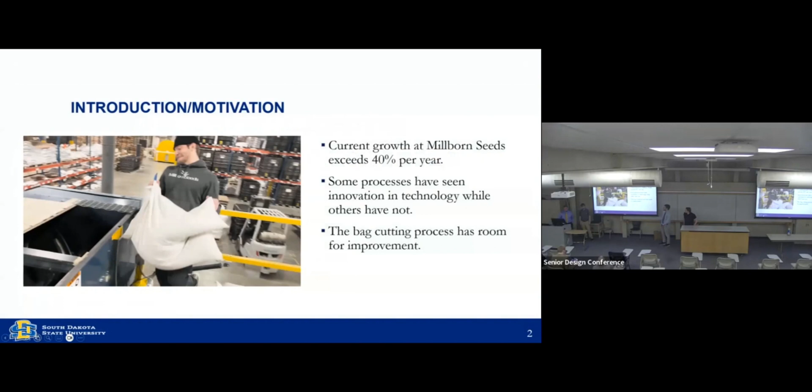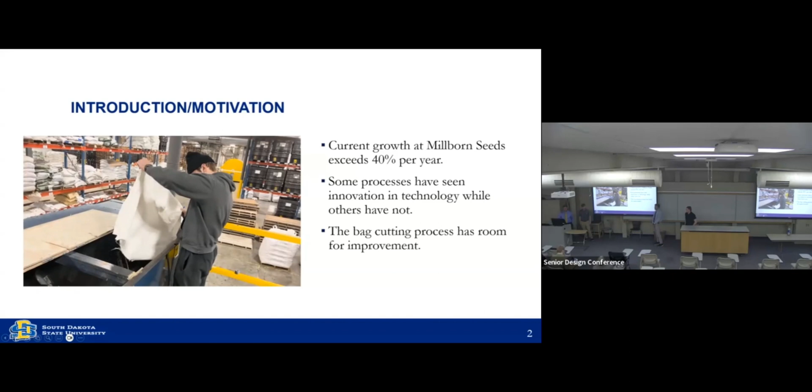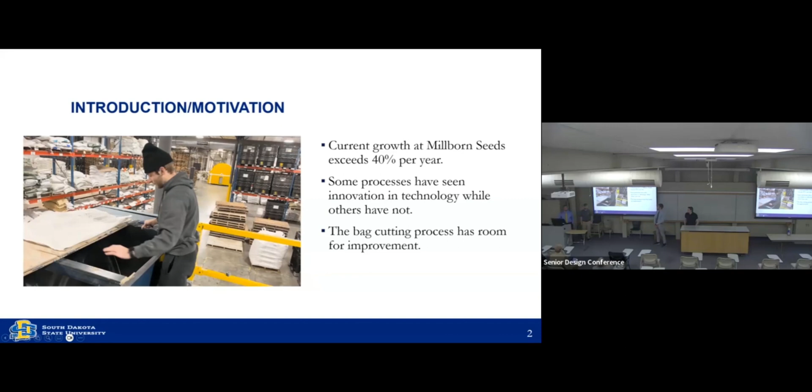So in the past few years, Millborn has experienced 40% growth every year. And with that, there's been a big increase in automation of weighing, packaging, stacking bags. One thing that hasn't changed though is the cutting, as seen here. And so with the device that we're designing, we're hoping to almost fully automate that. So our main goal is to increase the efficiency with which Millborn Seeds produces mixes by automating the cutting process.

All right, so looking at some of the requirements that our sponsor gave us, he mainly wants to prove the concept for different designs that we want to go forward with. Right now, one person does about 4 bags a minute, and our goal is to hit 10 plus bags per minute, and maybe even higher if there's more people operating. Basically 99.9% of seed needs to get out of the bag, so we can't have too much in the corner, because these can be like 50-pound bags, so even 0.1% is quite a bit, and it would cost them a lot of money over time.

So it needs to be able to be run by one operator. If 2 can run it and it goes faster, that's great, but 1 operator is a requirement in case they don't have a lot of workers that day. They don't want to cut it down. Our maximum size that he gave us was about a 20 by 20 area. He says we can go longer in one direction, we just can't go into the halls that they have set up. We need to make sure there's easy access for cleaning. That's very important, otherwise the downtime between different mixes of seed is going to be way too long. And it needs to be user friendly for the operator, so on and off as their only control, and it needs to be ergonomic for bag loaders.

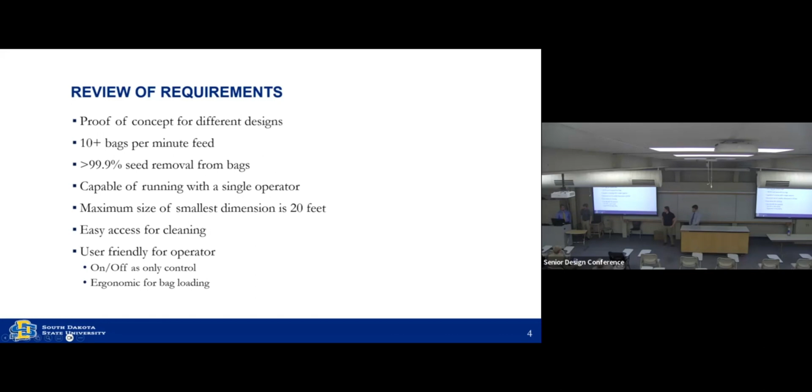On the top is a little filter that gets rid of the dust and kicks back the seed so they don't waste any of it. And then they kick out the bag to the bottom and drop it through an auger, which we're not going to go into in that depth.

All right, so the first aspect of design we took into consideration was the blade types, as we have to open the bag before we do anything else. So the designs we wanted to talk about were single saw, multi-saw, band saw, and a hot wire. The hot wire was eliminated right away because of the melting bags problem. But some of the other considerations with these blades were we have multiple different bag sizes and multiple different bag types. So we have a paper, a poly, and a plastic bag.

So we want to make sure that whatever blade type we choose is able to work for all of our bag types and sizes. So from that, we made our decision that multi-saw would likely be our best, as it would split it into smaller pieces so we can get those clumped up seeds out of the corners of bags.

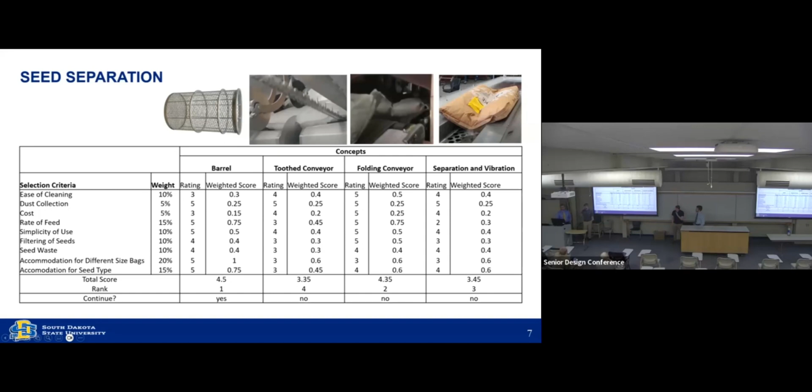But we went with the barrel for our design. The last thing, which was very vital for Millborn, is that in between pallets of different types of seeds, they want to clean out the seeds so there's no cross-contamination between different types. As of now, they're using leaf blowers and other air nozzles in some of their other mixers and machines.

This was an important thing for them, so three main things we wanted to do were air nozzles and fans for manual blowout, but we want to try to get away from this manual blowout. Air nozzles and fans were our main idea, putting fans in the system to blow all the dust and seed into the main section where the barrel was, and having compressor nozzles going out to any spots where seeds could get bumped up, so our dust system sucks all of that out the top.

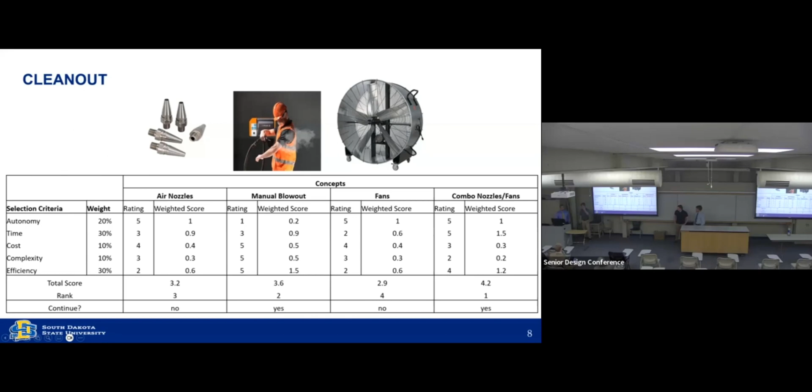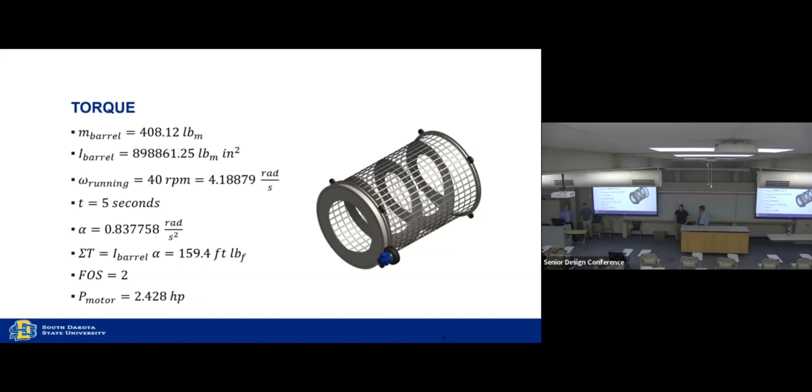So we are looking at a running angular velocity of 40 RPM. This will allow 2 bags to be within the barrel at the same time, within that 6-second window. We were looking for a startup time of approximately 5 seconds, as the maximum is going to be that starting torque, not the running torque. From that, we were able to get a starting torque of around 160 foot-pounds. Incorporating a factor of safety of 2, we need around a 2.5 horsepower motor to operate that barrel.

That has led us to our main model here, pictured on the screen. On the right hand side, there is a frame with a barrel inside. The seed will come up the conveyor, down slope through the blades into the barrel, where it will disperse into the frame. Looking more closely at the cutting apparatus, we are going for a 2-blade design with adjustable widths, so the blades can move in and out to accommodate different bag sizes.

Within the barrel, it'll likely be driven similar to how a cement truck mixer works. A tire will rotate, and the friction between the two will rotate the barrel itself. Included with that torque calculation is the normal force required pushing that tire into the barrel, which we figure to be around 60 pounds.

Within that barrel, there's a corkscrew that'll control the bag as it goes through. This bag will come in and move through the barrel, and there will be bars that flip it up in the air continuously as the corkscrew pushes it through the barrel, all mounted in the frame.

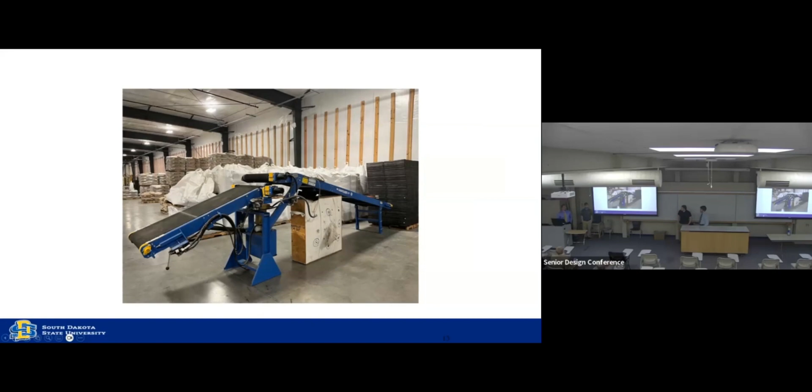Here's a picture of the already existing conveyors. This is something we're having to deal with. Changes to this will involve taking off the end section and increasing the height.

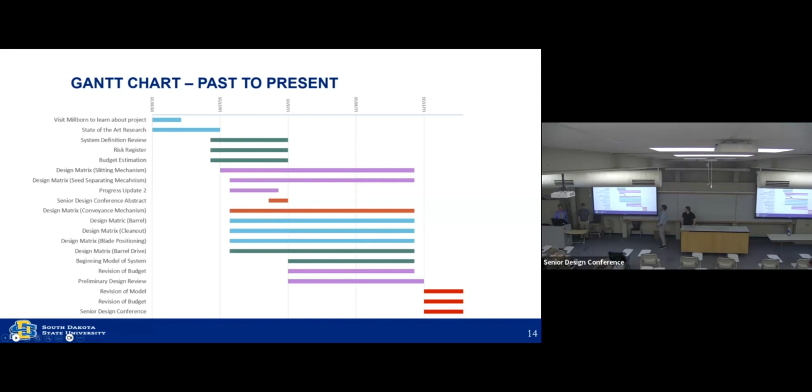Here's a look at our schedule. As Dr. Lesher mentioned, we didn't start this until October 20th. We just got our preliminary design review completed. Moving forward, the big thing we need to knock out before having a complete design in the second week of January is having a proof of concept ready for the barrel before we can decide on its length. We need to show how much time is required in the barrel before completely emptying the seed.

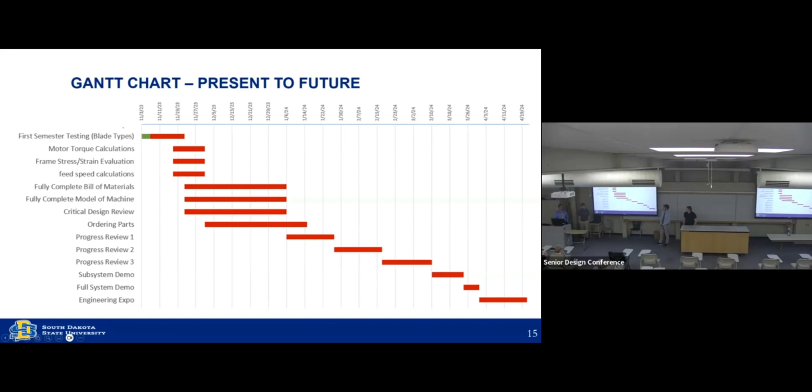Are there any questions?

Since you just started, will there be problems with the increased angle causing conveyor belt slipping of bags, or will there be enough grip? We are currently looking at maximizing that conveyor angle at 45 degrees. It is a rubberized conveyor, so there shouldn't be any issues with bags.

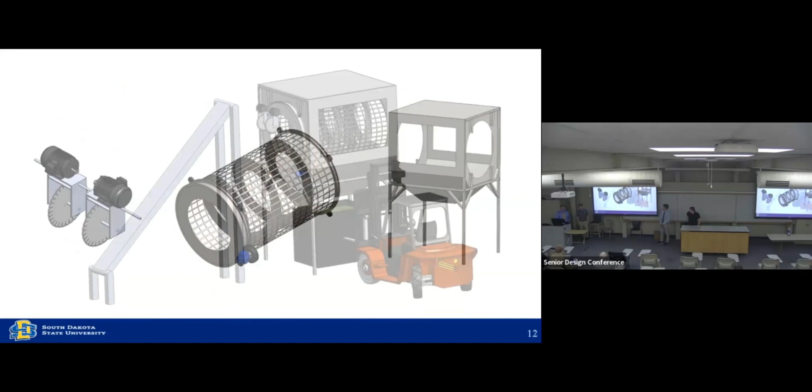Are you worried about seed not coming out of the bags if it's cut on one side and lands in the corner of the bag when it's spinning around? If you're talking about our testing photo, we weren't able to get a deep enough cut blade to get through the entire bag. Within the model, we plan to mount the blade above and have it recessed into the slide so we get full depth cuts. So you're planning on cutting the bag into 3 pieces, basically. Yes.

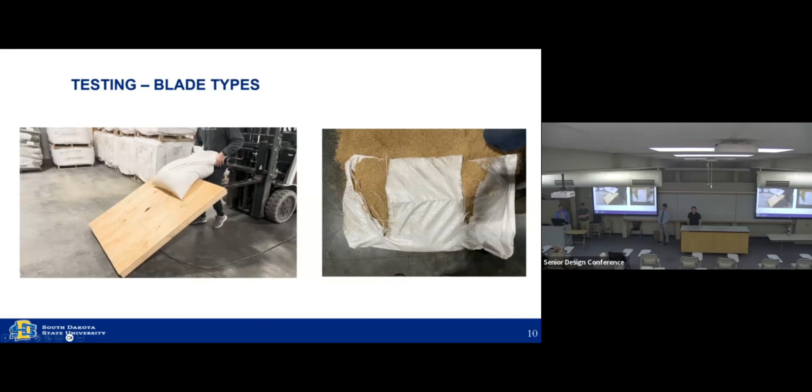Go to your next slide. Is there a reason it's so tall, or do you need it to be that tall? What's the reasoning behind that? This black box on the bottom is what they currently have to put all their seed into - the pro box. It stands about 5.5 feet tall, so we have to be able to get seeds in there with enough clearance for forklifts.

From this model, this cone shape will be reduced. We weren't sure what angle the seed would need to slide into that pro box - it's modeled at 45 degrees, but from testing today we saw that around 25 degrees works. That'll shorten it by about 1.5 feet, and decreasing the barrel diameter will decrease it by about 1 foot, so it should lower the center of the barrel to about 13 feet off the ground.

You thought about cutting it on the ground and then taking the seed up to the box, so you wouldn't have to have the barrel? Yeah, the problem with that is they're kind of a flimsy bag, so once you cut it open, there's nothing holding that seed on the conveyor belt, so it would just be spilling all over the place.

And if you're referring to cutting the bag at ground level, dumping the seed into something and augering it up - a concern with an auger is crushing of the seed. So they do currently use that as their mixer, but augering it multiple times would likely cause more damage.

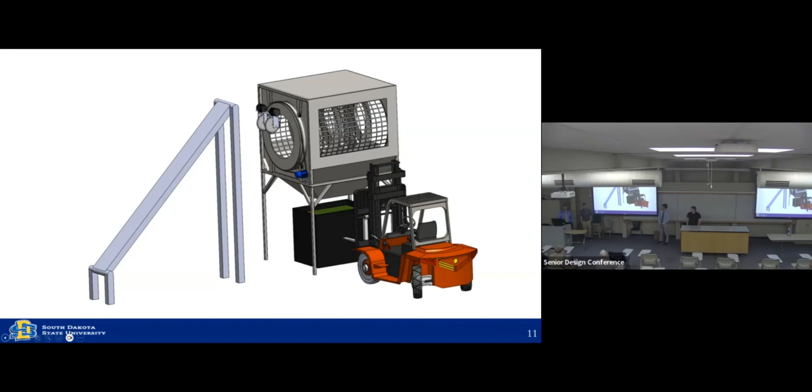It'll likely be through a control system. For the cutting apparatus, we plan on putting a power screw connected to the center, so they'll be able to move in and out in sync. Generally when they do this type of cutting, they'll cut an entire pallet of the same thing, so you can just set it for that bag, and then when you run your clean out, you can readjust your blades for the next pallet.

Are they relatively the same height? Will you have to adjust up and down for depth of cuts on different sizes, height-wise, or are they all kind of the same? Our blade, as of right now, should be big enough that it's kind of one size fits all, being oversized with the small bags, but big enough.

What size is the blade right now? 18 inches. That's a scary blade.

I know you guys were working on ways to drive that barrel, coming up with a wheel against the barrel, just maybe a minor modification. What if you replace one of the 4 roller supports with that wheel and motor? Because then it's automatically going to pull down into that, and probably have a little less tendency to try to push that wheel into the barrel. Just a suggestion.

If you're cutting the bags before they're in the barrel, and cutting them into full sections, are you worried about losing seed before the seed gets into the barrel? Yeah, so not pictured here - surrounding that cutting apparatus, there'll be a slope section with 2 slits in it lengthwise, and another slope section underneath. So any seed that falls through that slope section will be caught and pushed into the barrel itself.

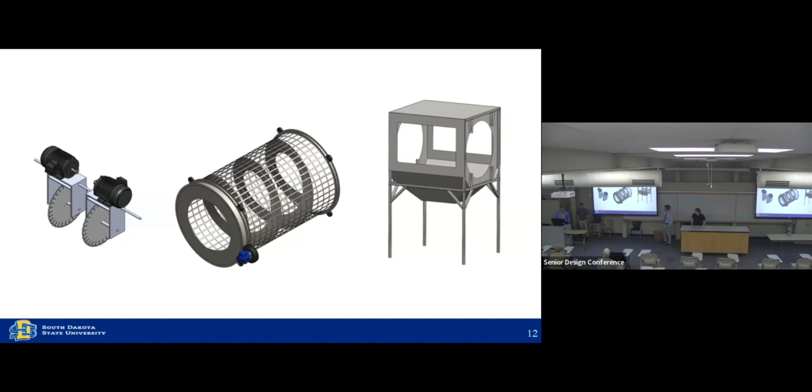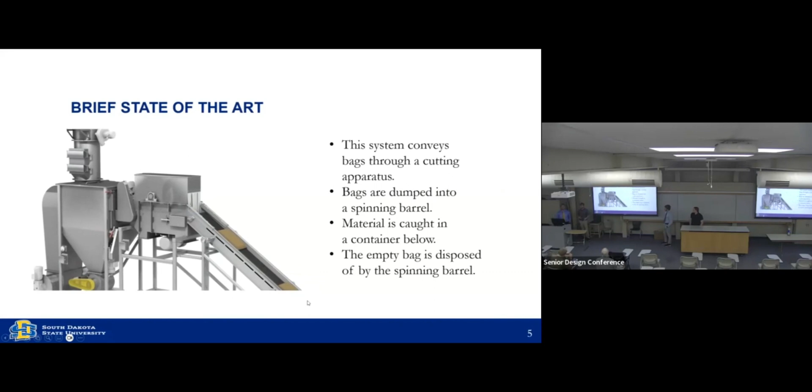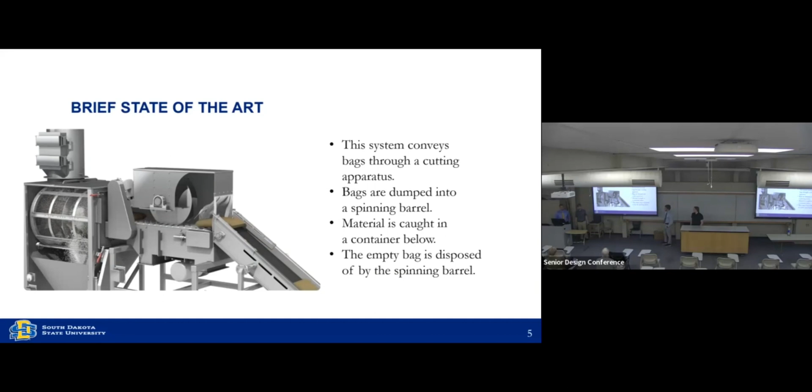Can you talk about the dust collection? Maybe they didn't understand something. Yeah, so with the dust collection, as seen in the state of the art - a lot of their other systems, because they're working with seed, there's a lot of dust that gets tossed into the air. OSHA regulations say you can't have more than 1/32 of an inch of dust on surfaces. So as you can see above the barrel there, it's basically just a filtered vent that goes up top. That's something we could add onto our system once the rest of the design is fitted.